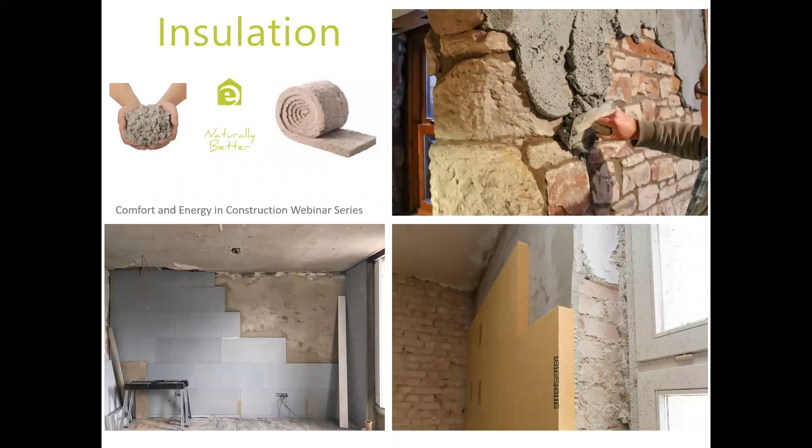I suppose my own experience, before I get into the topic, I spent a long time studying topics around this broader area of energy and comfort in construction. From studying things like green engineering, sustainable construction, or energy management, it's given me good insight into energy efficiency in buildings and appropriate building methods as I've gained experience over the years. I come from a trade background originally, but I spent about 10 years in and out of college over time, partially through TUS, as it's now referred to. You're never finished learning in these kinds of things, I find.

Our company itself, Ecological Building Systems, is a division of a parent company called MacCann & Byrne, and they've been around since about 1906 - a generational company, still owned by the same MacCann family today. Around the year 2000, their managing director, with a lot of foresight, working with business partners out in Europe, saw a shift in the market towards insulation and high performance building. So he started sending around little faxes to people, asking did they want to be involved with a little company based in Meath, Ireland.

One company came back at that time, and it was our airtight product partner. I'm going to be speaking about airtightness in a later event next week, but they came back, and from that we partnered with many of the insulation providers you see listed on the side: Gutex, Diasen, Calsitherm, Thermo Hemp, and so on. So we have multiple partners, and we've gained experience over the two decades that we've been around.

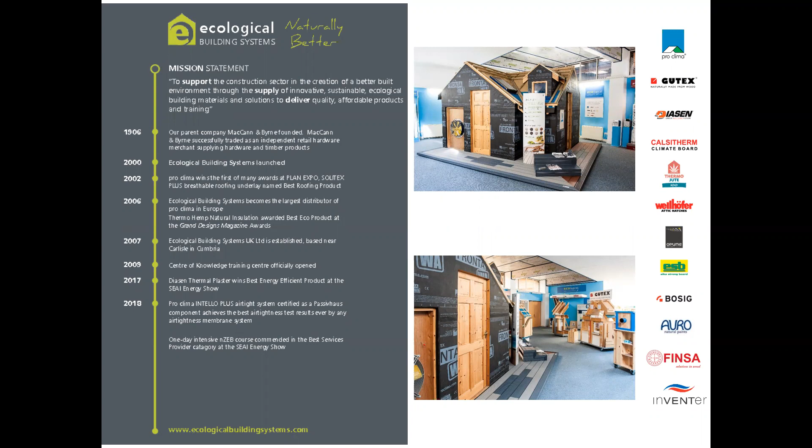So we'll jump straight into it and take a look at some of the current trends we see out there in terms of insulation. One of the big trends most people will see can be directly related to the news you watch every night. We're all seeing things like big floods in Pakistan, droughts in Spain, fires breaking out in Canada and Greece, mountains going up in flames. It's a worldwide climate emergency - there's no denying that, in my opinion. As a result, every sector has a responsibility to drop its carbon emissions, and insulation is no different.

Particularly in Europe, the EU has committed to be the first climate neutral continent by 2050 - in other words, the first with net zero greenhouse gas emissions. Where does building fit into this, and insulation? Well, overall emissions partially come from transport and agriculture and other sectors, but a large proportion - in fact 40% of total energy use - comes from the building sector.

And of that entire 40%, about 75% of that stock of buildings is very, very inefficient, with minute amounts of it renovated every year. So the existing building stock offers really high potential for carbon savings, because if we can make them more energy efficient, they'll use less fuel, and therefore there'll be carbon savings. But we can't take our eye off what we're going to insulate them with in the first place, because that in itself has an embodied carbon content.

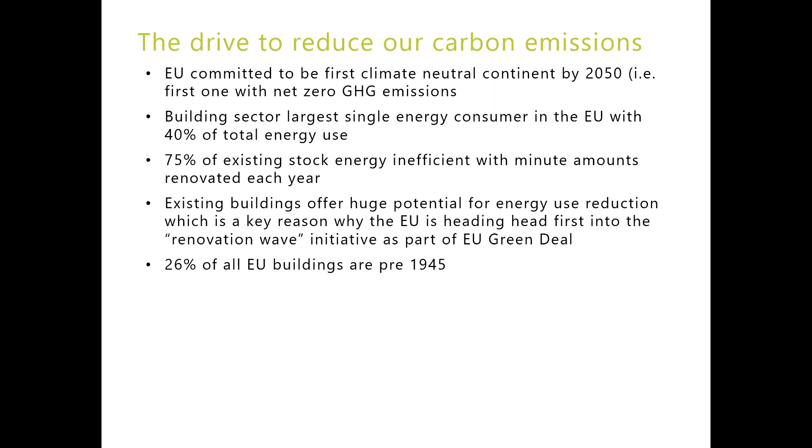What we're seeing as a key trend is the growth of resource efficient building methods, and with that, the types of material that's being put in. It's really due to the growing awareness around climate change. I just put up this slide to pull out a couple of the resource efficient building methods that people are becoming more and more familiar with all the time. These types of solutions help to de-skill the manufacture of buildings amid the huge demand that's out there.

We're seeing straw as an insulation, as a primary insulation and building method, growing and growing, because it's an agricultural byproduct - around 25 million tons produced every year, 10% of which would be enough to insulate 500,000 dwellings per year. So you can see there's huge potential in this otherwise wasted material.

Timber frame and off-site construction and stuff like that means they're looking for easier and easier ways to pre-prepare these types of buildings with insulation. So it's kind of having an influence on manufacturers innovating on what's out there.

At Ecological Building Systems, we've been promoting methods like this for a long time - the use of materials like hemp, wool and wood fiber in place of carbon intensive synthetic alternatives. If you have a building method that by weight can sequester 50% of its own weight in carbon, then the last thing you want to do is put in a very energy intensive insulation into that.

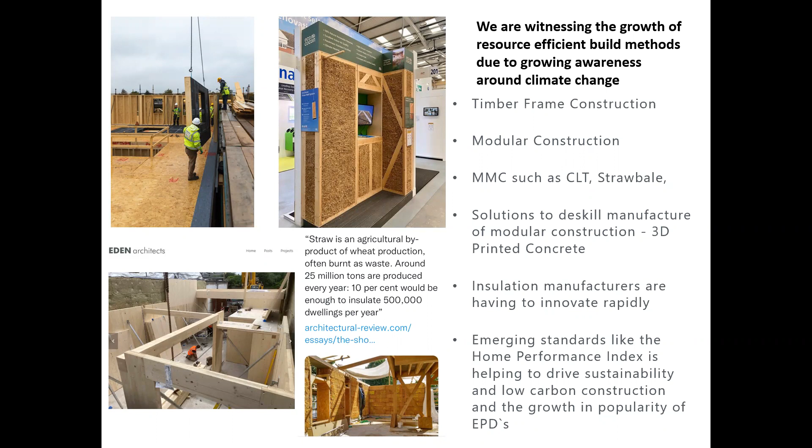Another key trend is the uncertainty that surrounds the fuel crisis happening throughout Europe. As the pinch is put on everybody's pockets, we're starting to see the importance of conserving energy as much as possible. Now, the energy I'm referring to there is primarily the operational energy it takes to run a home or a building.

But the problem is that our building regulations have already pushed us to the point where we're nearly passive. So NZEB and passive are very close in terms of U values, thermal bridge free construction and air tightness and stuff like that. They're not the same, but they're approaching the point at which we're scraping the bottom of the barrel of operational energy savings.

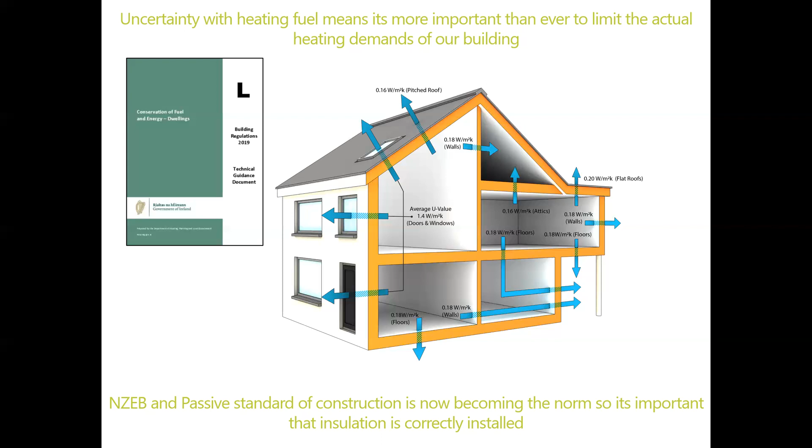So it's important that even though this has become the norm, we can't forget the other half of the equation. If we're saving all of this energy already by the fact that our buildings have become so energy efficient, A1 rated or passive, then we have to look at what we're building from. If we're going to be putting energy intensive materials into the building, they have a huge carbon potential - so we have a chance to reduce that and apply the other half of the equation.

What you're seeing is the industry reacting to the skills necessary for retrofitting of insulation and the application of high quality installations, because it would be very ironic if we had to retrofit the retrofits in 10 years' time.

So bodies like LOETB are running great courses, and I know TUS as well and Atlantic Technological University - they've even got postgrad courses in circular economy for the built environment and retrofit management, and all of this ties back into the demand that's out there now in the market.

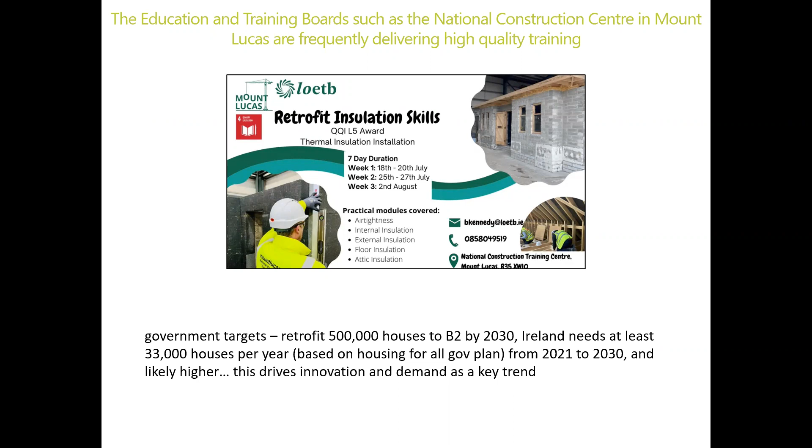Some of the common issues that we experience as insulation suppliers dealing with manufacturers in mainland Europe and the UK are price inflation and supply chain issues.

So many manufacturers are relying on the supply of oil-based, petrochemical-based products, and this fossil energy-dominated building material production has a lot of industries in crisis at the moment. Even companies producing more sustainable raw materials, like hemp manufacturers in mainland Europe, Germany and France, are relying on Russian gas for production. So as the price of gas goes up or becomes unavailable, the price of the raw material goes up in tandem. We're seeing this across the board in terms of material supply.

Natural materials seem to be, excuse the pun, a little bit more insulated from it because the raw material itself is not heavily reliant on a scarce resource. So from that point of view, we're seeing a big difference between the price inflation for petrochemical-based materials and natural-based materials, and the price is beginning to equalize a little bit. It would have always been the case where natural products were seen as the more expensive, desired option, but it's becoming more on par.

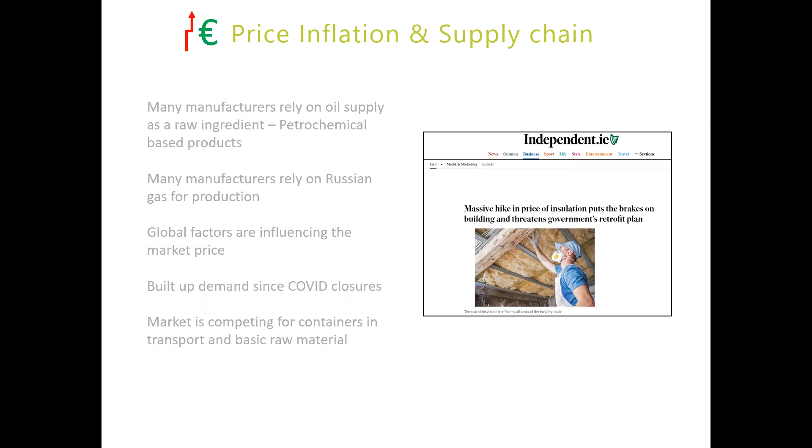Another key issue I'm personally experiencing on a frequent basis is some of the insulation grants available at the moment and the contradictions in how they're applied to traditional buildings. Many modern thermal insulation systems have really high vapor resistivity, and that can reduce drying ability for solid walls.

So if you were to use a system like the phenolic boards with dot and dab adhesive and press that against an old brick wall that has a single leaf and is relatively energy inefficient, there's a high likelihood you'll trap moisture behind that board, or allow it to infiltrate into a cold pocket where condensation may occur, followed by all the issues and problems that can come out of that.

As I said before, it would be a shame if we had to retrofit all the retrofits, but in the case of some grants available, like the Warmer Home Scheme, I know there are changes in the works specifically related to traditional buildings. But as I said, we have 250,000 of these to do.

At the moment, homeowners are sometimes seeking the grant aid package for internal wall insulation, and they're being advised that the product must have an NSAI Agrément certificate. This is a huge challenge for European-based products that already comply with European construction product regulations. They're CE marked, they have DOPs, and in many cases European technical approval, which would supersede anything. But because they don't have an NSAI Agrément certificate as an Irish stamp, which isn't necessary for the manufacturer, they're being taken off the table.

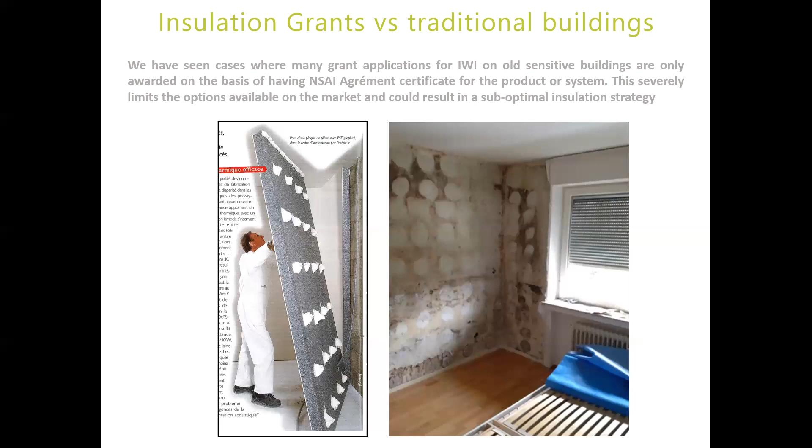But we do have a responsibility, if we're insulating these older buildings, to insulate them appropriately. This comes back to the responsible retrofit of the older building stock we have, because we've got a huge amount of it. It's outlined really in a lot of key documents, and here's one of the standards people often refer to, the conservation of cultural heritage.

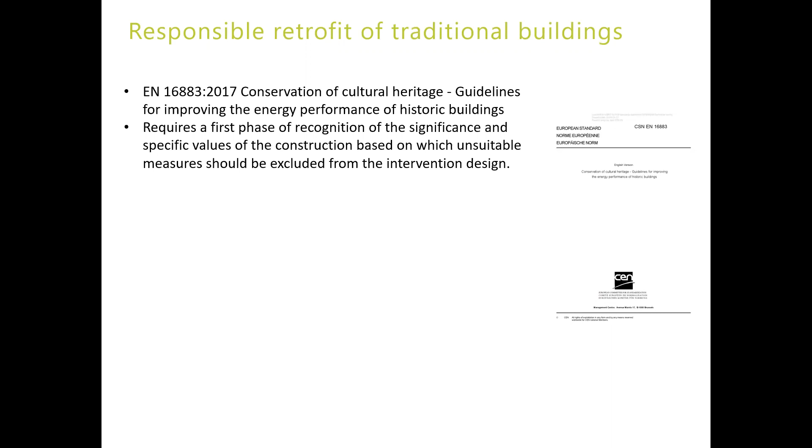Guidelines for improving the energy performance of historic buildings say we need to recognize the significance of the specific values of these constructions, and prevent or exclude interventions that would compromise how these buildings act in terms of moisture. But simply because a person is applying for a grant package, it may actually force them into a situation where risk is quite high.

Modern buildings are not designed like older buildings. Modern buildings have capillary breaks, cavities in walls, or rely on DPMs - moisture blocking forms of construction. Older buildings, on the other hand, are characterized by walls that need to be in a constant state of evaporation and absorption, constantly taking on moisture and letting it go. If we compromise that anywhere, you could end up causing decay to an older building.

This is a problem for insulation suppliers trying to get this message across to homeowners when there's an attractive grant package pulling them in a different direction. Great care is needed to ensure the chosen thermal solution doesn't compromise and lead to moisture accumulation. A lot of this is ongoing, but as suppliers we try to demonstrate how appropriate something is through a risk assessment according to the recognized standard, EN 15026.

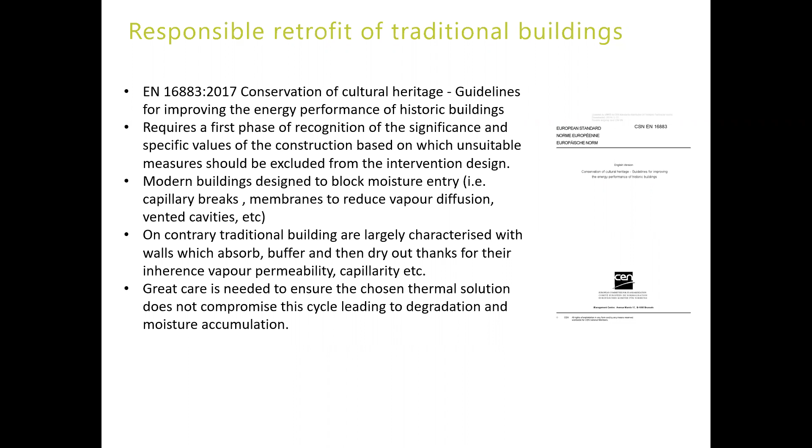So future trends and where the insulation industry is going - we certainly don't know everything, but we're learning all the time. What we'd see as insulation suppliers is that legislation is also beginning to move in the direction of low carbon construction.

Insulation choices really affect the carbon footprint of the building, in terms of embodied carbon and even operational emissions, because if you put enough of it in you can reduce operational requirements. Insulation can be a contributor to the embodied carbon of the building, or a carbon sink, one or the other. Looking at the insulation choices here from Architecture 2030, I thought it was a nice graph to include because it's simple - it's the carbon impacts of insulation.

If you're using something like XPS, the orange bar to the right shows it has a high carbon impact. On the other hand, at the other end of the graph, straw bale has a negative carbon impact - it helps to lock carbon into a building. This is why legislation in the EU as a whole is moving in this direction, and other EU countries are following suit very quickly.

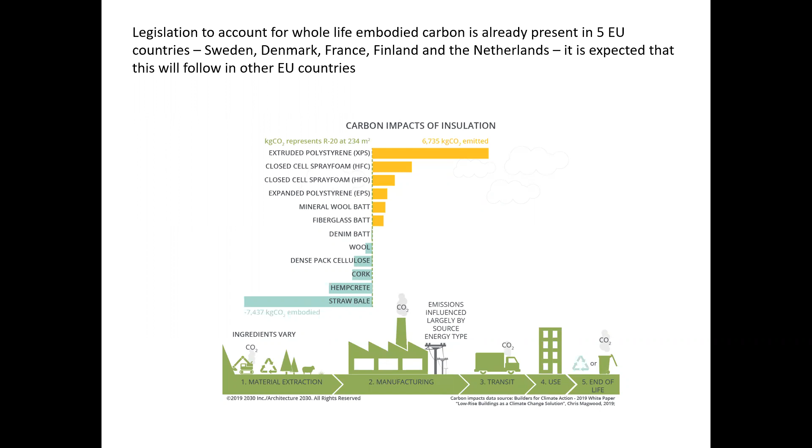Using natural materials and blown-in applications is the best way to reduce the embodied carbon of the insulation, but also the construction system as a whole. It helps to complement modular forms of construction or offsite construction.

We want to push the fabric as far as possible, but we're kind of at the bottom of the barrel now. NZEB - in 2019 we only moved on the BER scale from A3 to A2, if you want to look at it that way. That was a nice energy saving, but that's how incremental it's become. So we're kind of scraping the bottom of the barrel.

So we've got to now think about the materials going into them. Resource efficient principles mean lower operational and embodied CO2. Generally speaking, as a construction method, passive house is seen as the gold standard, and something all building regulations are trying to aspire to be like - in my opinion, should be.

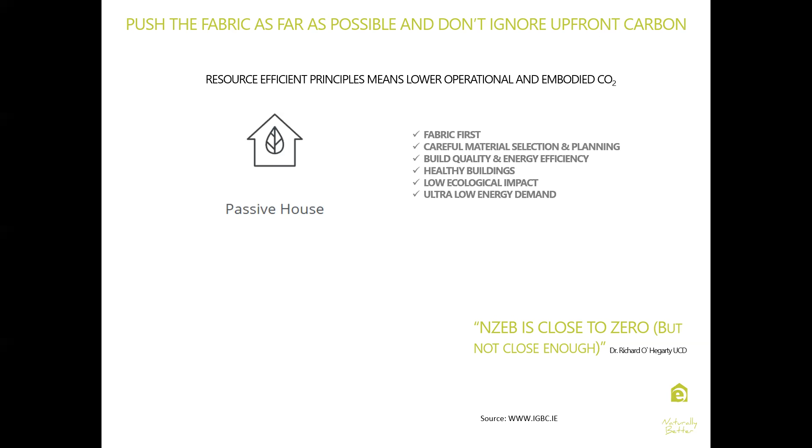We need to look at it a few different ways, but there's a nice quote on my slide from Dr. Richard O'Hegarty from UCD, where he said NZEB is close to zero - which would be zero carbon - but not close enough. That's in reference to the embodied or upfront carbon of the materials you're putting into it, and insulation makes up a huge proportion of that material.

And of course, circularity is becoming ever more popular as well - being able to reuse and be resource efficient within the industries, the manufacturing process and stuff is becoming more popular too, and legislation is driving us in that way. In fact, the Circular Economy Act only came into Ireland a couple of weeks ago, officially, I believe.

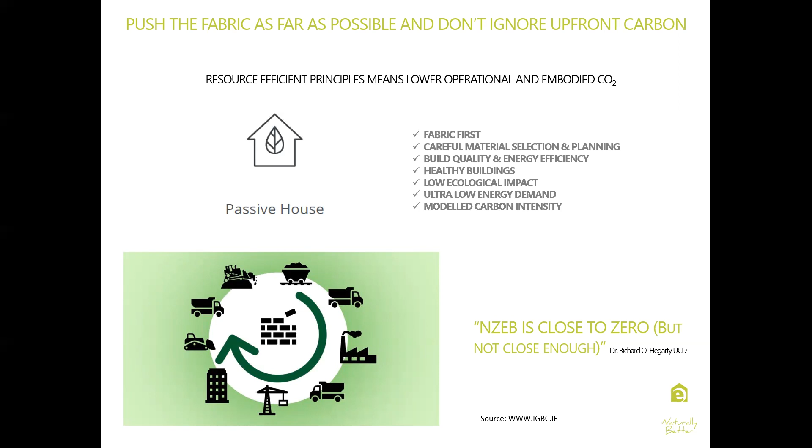So just some key facts about some of the natural insulations and the future trends and why it's going in this direction. If you look at, for example, cellulose insulation has the highest amount of recycled content compared to any other form of insulation. So it's quite straightforward as to why cellulose may be used.

Now it just so happens to have attractive thermal values and ability to buffer moisture and things like that as well. But all of the natural insulations, I could pick out 20 from the market, and I could select a lot of benefits and key characteristics from them. I'd struggle to do that with synthetic material or petrochemical based material. I'd just be looking at something like thermal conductivity only.

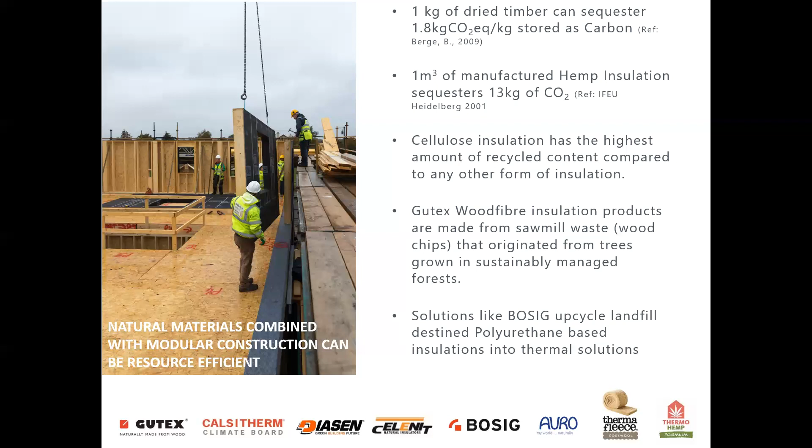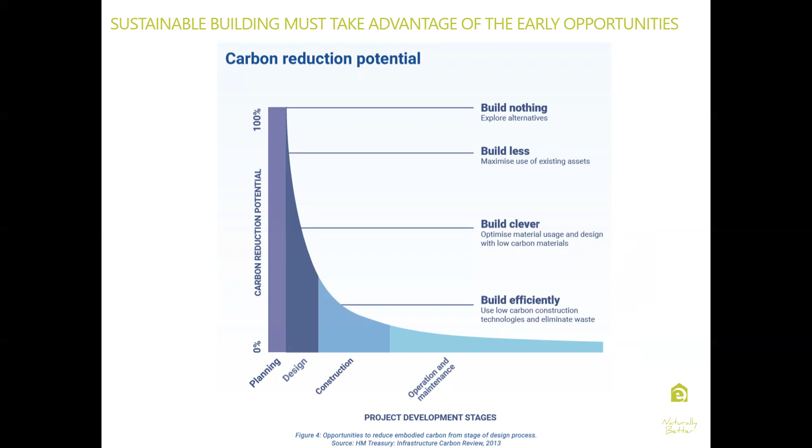So if you build nothing, in other words you're not using any carbon, but that's not practical. So maybe we just build smaller buildings and then we're saving a lot of carbon. Or we build clever, so we put natural insulations into the product as you come down the screen. And all of these things have carbon reducing potential. So if you use carbon clever materials with clever design, there's a huge opportunity to tackle a big proportion of the problems we're seeing.

This is a present and future trend, but materials are really going to require a lot of future third-party testing for VOCs and healthy building standards. They're all positive steps for specifiers of insulation materials, but it's certainly something like declarations and standards to adhere to, like the Living Building Challenge and third-party testing in Sentinel House for VOC content and stuff like that. These are all things that a specifier can read and can say, well okay, now I know what potential harmful impacts to human health a material has, and likewise how energy intensive a material is becoming.

So we're all aware of EPDs, or environmental product declarations. Insulation providers are now producing these as a source of transparent information, really useful for everybody, but specifiers mainly. If everyone is writing it the same way, which they should be - but there's a lot of nonsense out there too, I have to be honest - then people can make judgment calls based on the values produced and the values transparent to them.